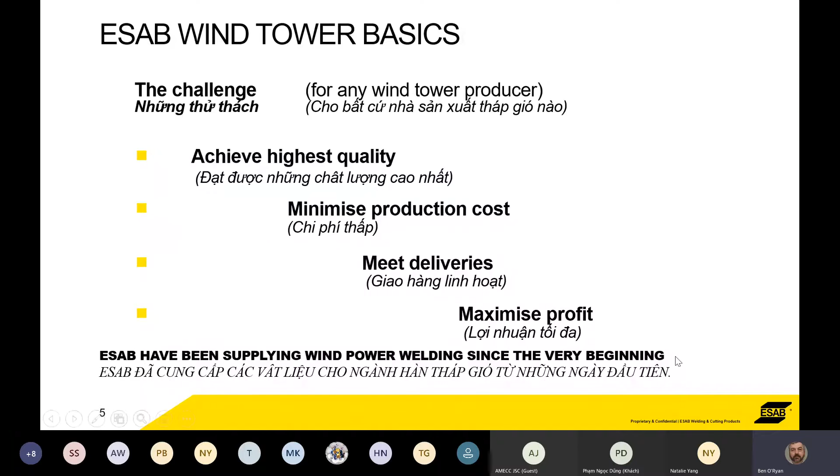Price too high. We hear this a lot from a lot of customers, and we need to embrace the total economy approach. So when you look at the operating costs, personnel costs, administration capacity, correction and reject costs is a big one, maintenance costs, all of these are under the waterline that you don't see from your initial purchase price. So improvements offered by ESAB can often more than compensate a higher price. We offer support to minimise this under the waterline exposure by buying quality equipment.

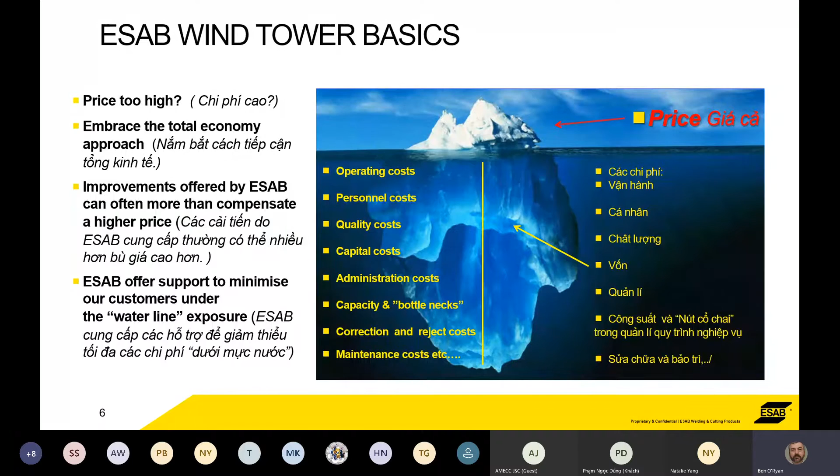We have extensive know-how and expertise in wind tower industry. Like I said, we've been in this since the very beginning. We can supply our customers with truly profitable investments.

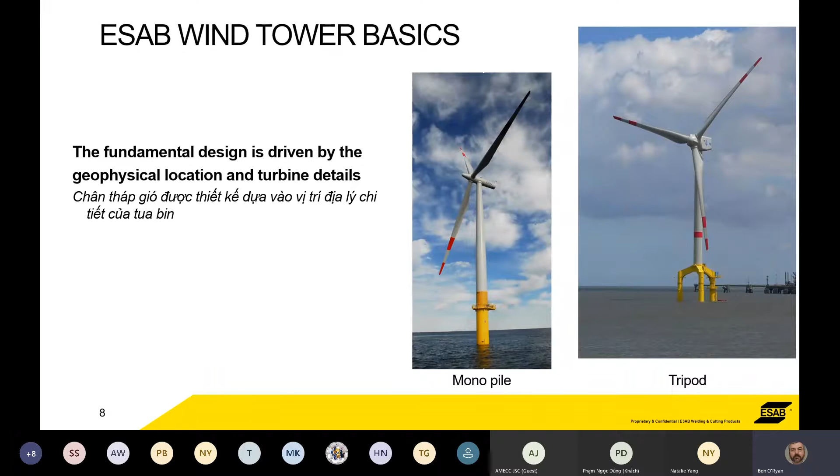When we start the fundamental designs, it's all driven by the geophysical location and turbine details. So this determines what type of wind tower is going to be placed in what location. And these pictures here, we show a monopile and a tripod. We also have jackets and tripiles, all different types of versions for supporting the towers.

So when we look at a wind tower, you can see that we have a nacelle sitting on the top. We have the tower piece itself, transition pieces, and you have the bases, and they can be monopile, tripod, tripile, and jackets. So how do we turn a steel plate into a wind tower?

Basic weld design and joint design quality requirements. These are the things you have to consider. The welding process selection, welding consumable selection, properties and performance, and very importantly, the third-party approvals that you're going to need for these predominantly offshore towers.

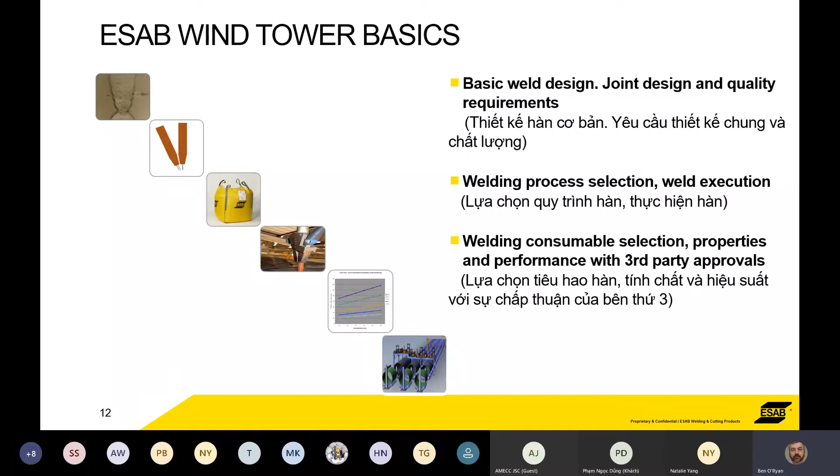Additional processes, root treatments and coatings have to be taken into consideration, and removing those coatings when you're going to weld as well. Productivity calculations, deposition rates, all of these things have to be taken in. Factory design, process flow with adaptation of environmental concerns.

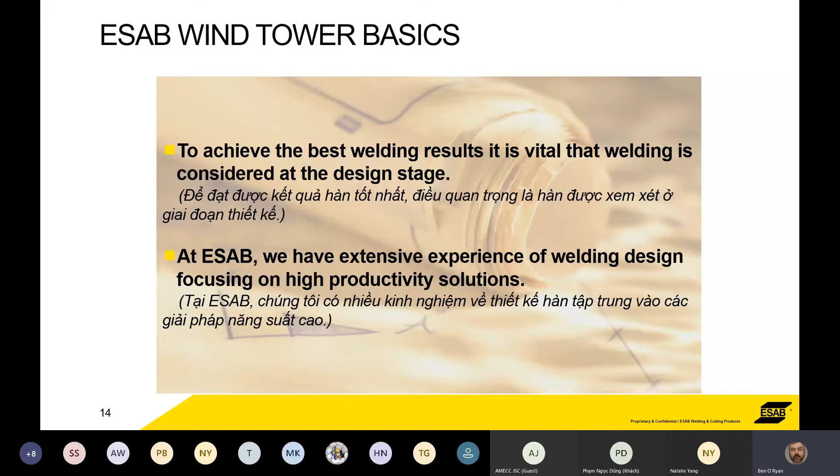So to achieve the best welding results, it's vital that the weld is considered at the design stage. So before you even start, you need to look at what type of welding you're going to be doing. At ESAB, we have extensive experience in welding design, focusing on high productivity solutions.

Welding in wind towers is a large part of the production time because the welding process is not so fast and it does take a long time, and it is a major part of the total cost. So efficient welding processes are needed to increase the productivity. The selection of that supplier and process are critical to achieving the highest efficiency and the maximum productivity.

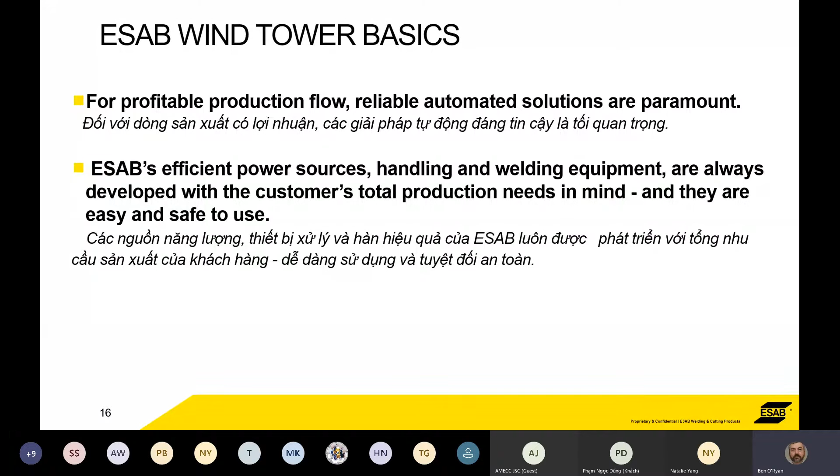For proper profitable production flow, reliable automation solutions are paramount. So you need to have reliable roller beds and columns and booms and/or gantries, ones that are not going to break down. ESAB's efficient power sources and handling equipment are developed with the customer's total production needs in mind. It's safe and easy to use because it's European and complies with all the international standards.

So when we look at this weld joint design, we talked about this a little earlier, it's the first decision you make. The weld volume reduction should be the aim. If you can reduce your weld volume, you're going to increase the speed that you can weld or produce the article. So if you can reduce it, it's always a good thing. Welding duty cycle, efficient use of welding stations. So you need to look at what the arc on time is going to be for each welding station.

Welding productivity: increased productivity reduces the welding time. Again, it's all about the speed, efficiency at limited additional costs. It can also determine how many welding stations you're going to need. If you're going to use a tandem with ICE, for instance, you may need one less column and boom, which can be a capital expenditure.

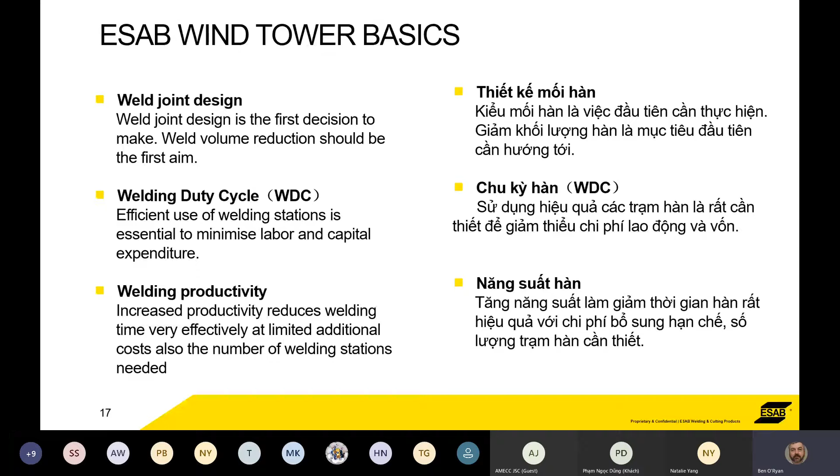So we look at the basic flows now. So we look at a plate and we have to cut that and you have to edge prep it. Once that's done, then it has to be formed or rolled into a can. From there, you need to tack weld it. Then it does longitudinal seams, both internal and external.

Then you put flanges on if you need a flange. So it's normally a flange on one end and then a flange on the other, so it's normally only two, depends on the design. And then you have fit up and growing lines, circumferential seams, which take the most amount of time, door frames, and then blasting and painting if required. Some monopiles don't need to be blasted and painted.

Cutting systems, this is where we start, because you have to cut and prep the plate. With our modern cutting machines, you can get a perfectly prepared weld preparation, accurate and ready for welding. All that needs to be done is a light clean and then you can start. Milling's also become a common alternative, and this is used for a narrow gap alternative. So semi-narrow gap, not full narrow gap. I have a short video here on the process.

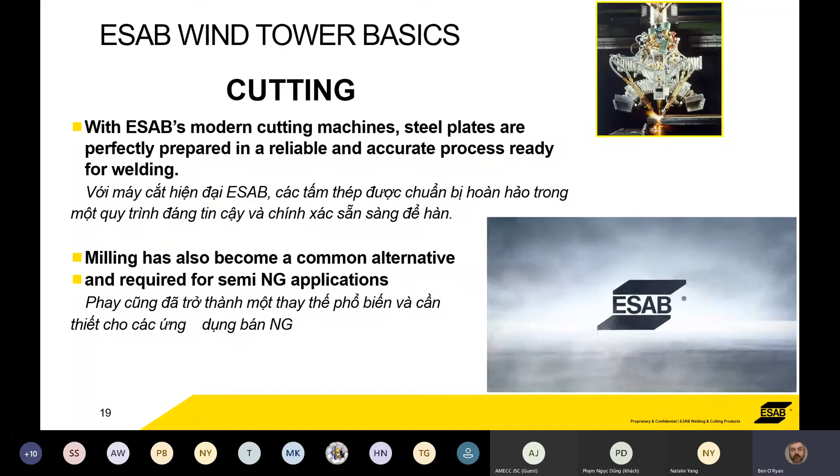So we talked about narrow gap on the previous slide. This is becoming a much more common weld preparation for wind towers if we're looking at very thick materials, and in this case it's 80 millimeters thick. Some of our narrow gap applications we've put in place already have been up to 95 millimeters, and these welding heads can go up to about 120 millimeters. You must use a milling machine for these, so it's not an oxy-fuel application.

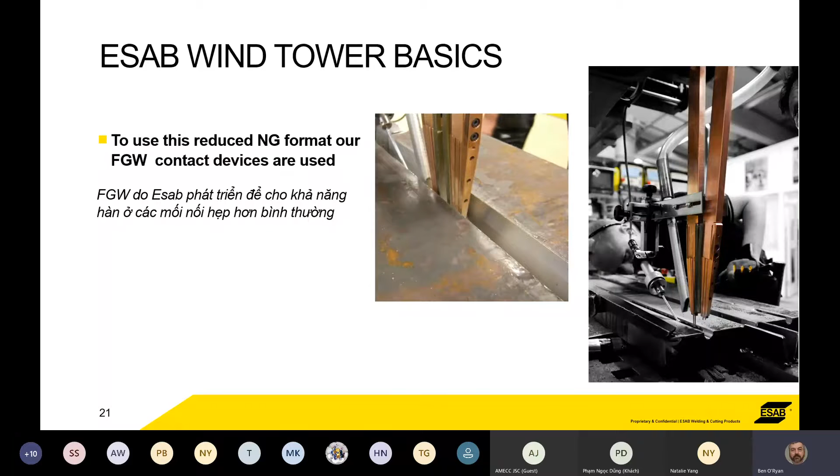To use these, we have specialised welding torches, and they are tapered at the correct angle, and they're insulated. And this is what you'd have to use for these very narrow gap applications. After cutting and milling, the plates are rolled into circular shapes and tack welded.

Power sources, welding heads, control units, columns and booms, roller beds, flux systems and more all have to be incorporated from this point on for all your welding. To do this, you need to weld the internal long seam on both the outside and the inside, so you need the roller beds as well.

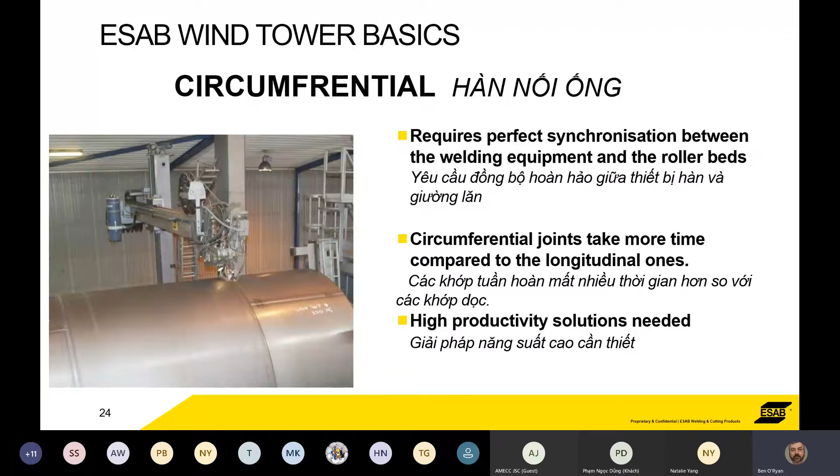Circumferential welding. This requires perfect synchronization between the welding equipment, your column and boom or your gantry, and the roller beds to give you the correct welding speed. Circumferential welding joints take more time compared to longitudinal ones. So you need to have a high productivity weld for the circumferential welds.

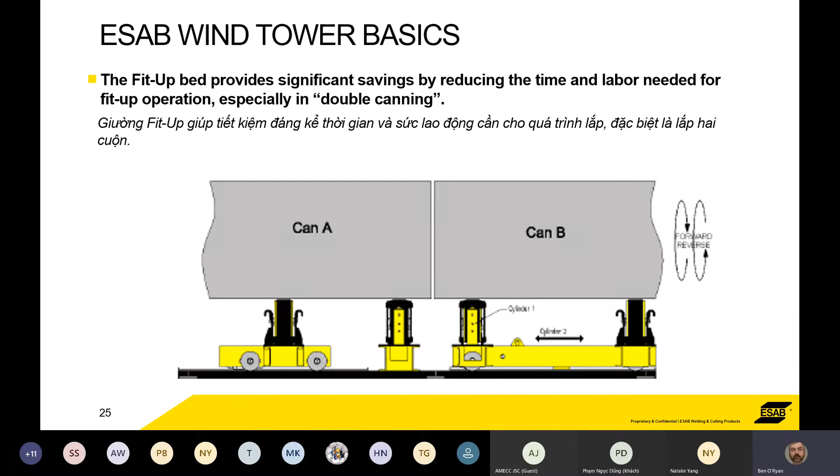Fit up beds. A lot of people use fit up beds to do a can-to-can application. This reduces the amount of time on the growing line. So it's up to the customer whether they need to do double canning or whether they want to go straight from can direct to the growing line. So this is just a picture of how these growing lines work.

Oh, excuse me a moment, I'll just turn on my pointer.

Here you can see that these have hydraulic units on the fit up bed and one drive. So this makes it very easy to align your cans so they can be tack welded, and then the circumferential weld can be carried out. And then we move into the growing line format. And this is what most wind towers are using today.

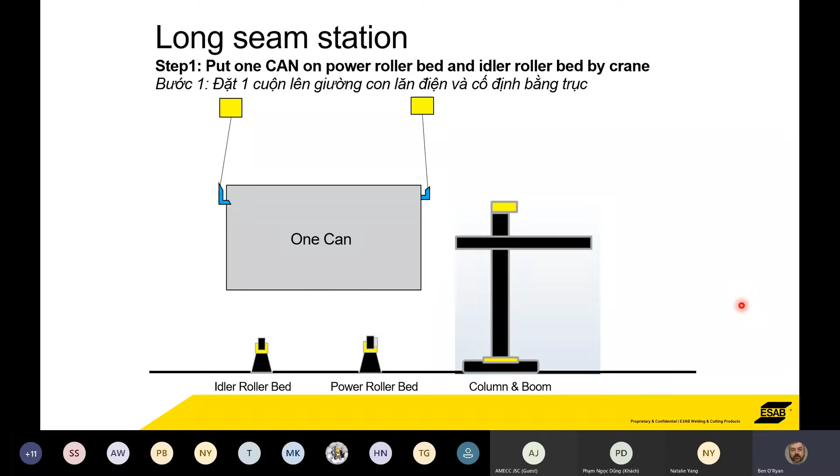So we start off and we have one can. So this is where we're going to start from the long seam. We have a column and boom. We put the can onto the roller bed, and then we weld the long seam, both external and internal. And then we move by crane from that point to your growing line.

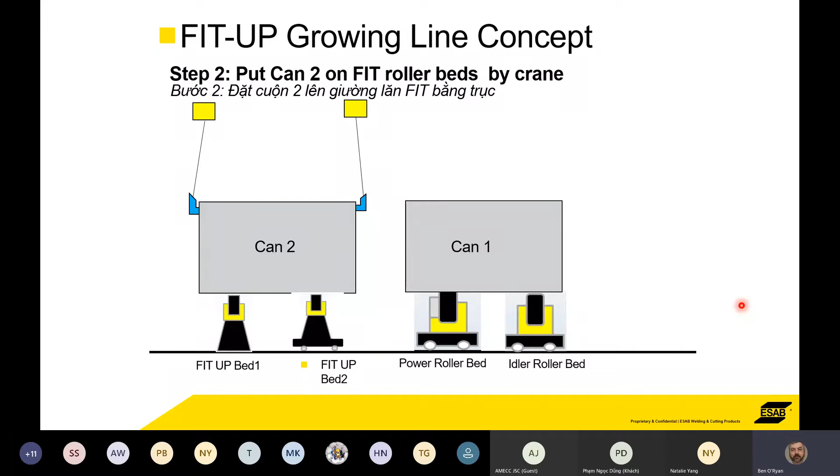And the first can is put onto the power and the idler roll by the crane. Then you get the second can and you put it on the fit up bed. Now both of these fit up beds have hydraulics, so you can align the two cans. So once that's done, you push the two cans together and then you align them.

Once aligned, you then tack weld. Once they're tacked in place, then the circumferential welding can be done from the external and the internal using a column and boom. Once they've been welded, then you move with the drive roller, power roller and the idler roller, which are on bogies, driven bogies. You move them off the fit up beds.

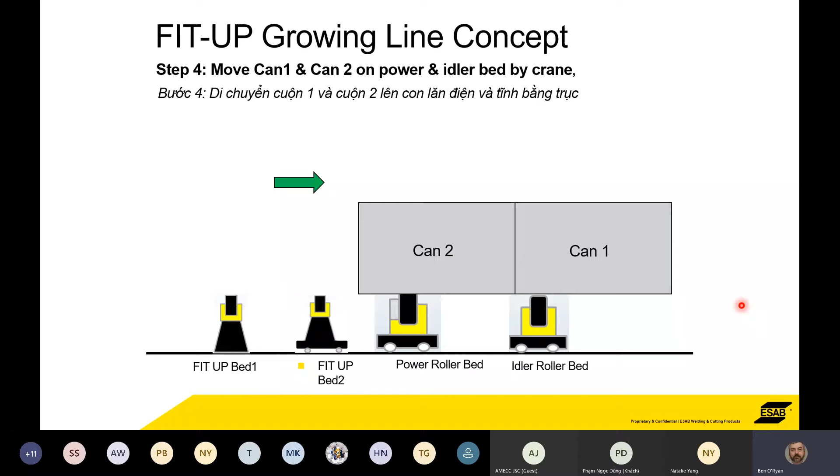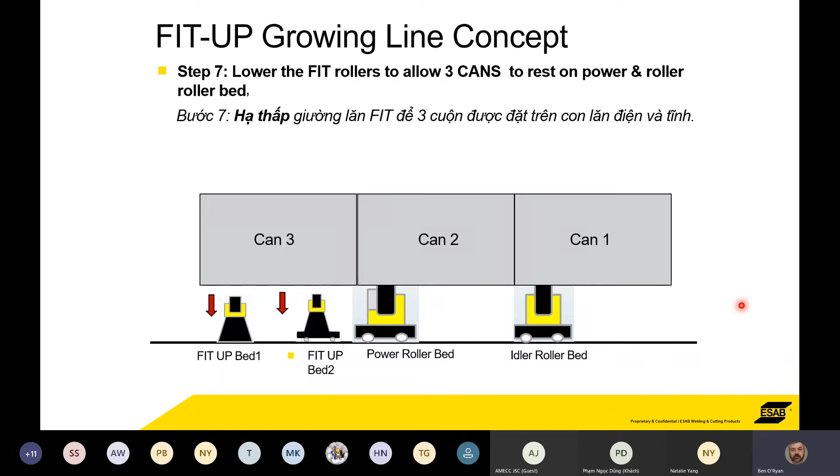Then you add another can onto your fit up bed. Join those two together or drive them back together. Tack weld. Then you're going to weld the internal and external welding. So then you have three cans joined together. Once those three cans are joined together, you then use the hydraulics on your fit up bed and drop the rollers. So the whole can is then supported on the power and the idler.

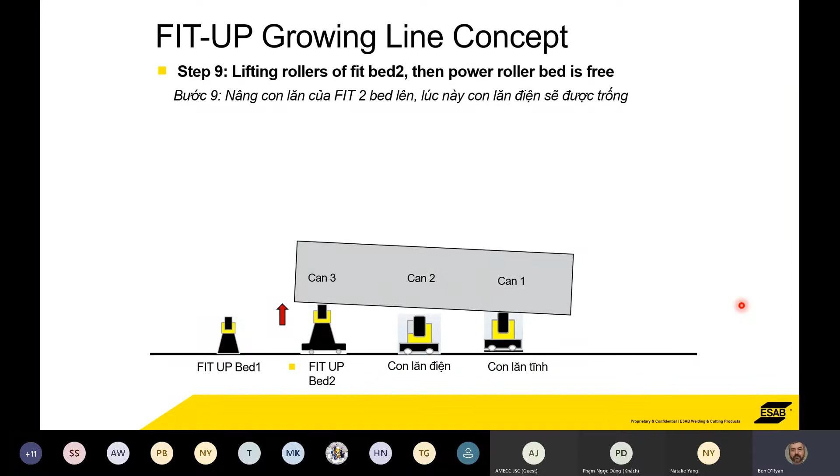Then you drive the power and the idler down your growing line. Lift up the fit up bed so you can release the pressure onto the main drive roller. Move the drive roller back into position. Drop that back down. Then you can add can number 4.

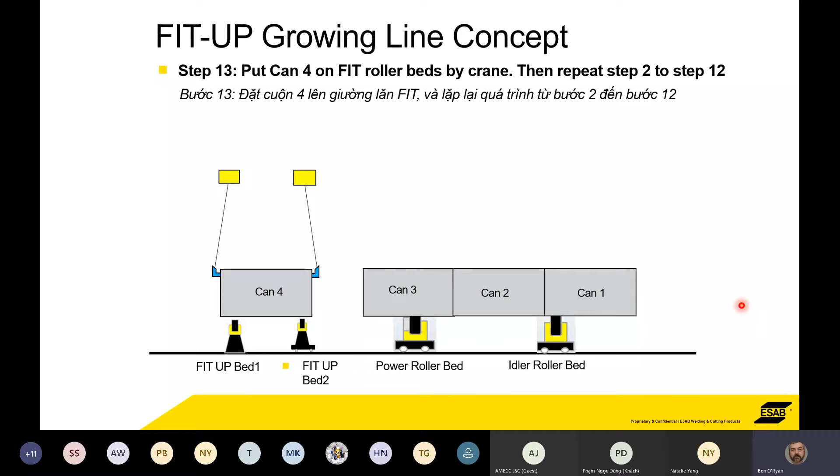So once you've added can number 4, you're going to repeat the process, and then you will just drive these together, tack weld, do the internal circ weld, do the external circ weld, and then do the same process over and over again to grow your cans into a tower, and 30 to 35 metres is pretty average for one of these systems.

To do all the tack welding, we do recommend that you have a good quality MIG plant. In this case, we prefer to use a Warrior. It's a multi-process MIG plant, which can do stick welding, MIG welding, and you can also gouge with this if you need to. It has very bright displays. It's easy to find the right process for optimizing your settings. It has a remote control, two-stroke, four-stroke, quick connections. There's no tools needed when fitting cables and hoses, so this saves a lot of time.

Door frames. The tower doors require special attention, and there is very high pressures applied to door frames, particularly when they're offshore. They can be hit by very large waves, so they have to withstand a lot of pressure. So we have CNC controlled cutting and welding equipment to fulfill this task.

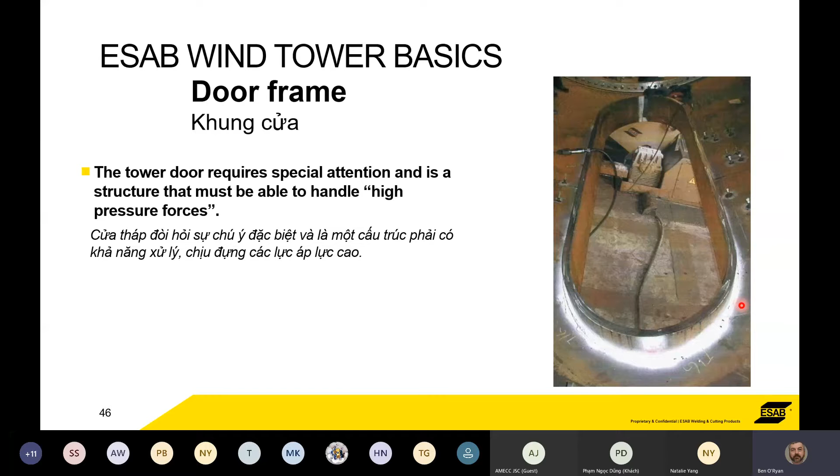Once this is done, blasting and painting is necessary. For onshore towers, of course, they're all painted. Some monopiles are left raw and not painted, so it depends on the design, on who the supplier is. And all the blasting and painting systems use explosion-proof motors and electrical cabinets, because we don't want to have any fires or explosions with all the paint particles flying around.

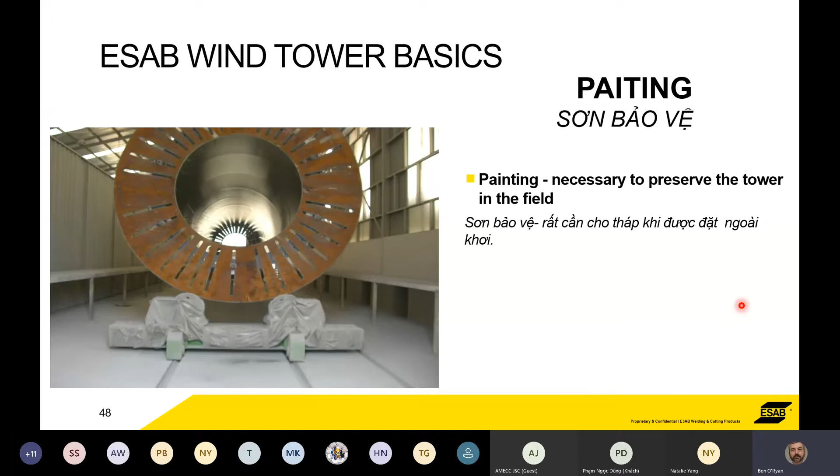Then we go on to welding. The choice of welding affects the deposition rates and the required travel speeds. You can start off with looking at a single wire system, which a lot of people used to use. Twin wire has a great fill process, but it doesn't have very much penetration. Then you look at tandem, which is pretty much the standard for most wind tower producers. And tandem ICE, which is becoming more prevalent. Places like SIF and Bladt use tandem with ICE. And you have multi-wire systems, which are normally DC, AC, AC.

All of our systems use our PEK control. It's a very easy system to use. We've had it for quite a few years. It's very powerful. It's CAN bus controlled. You can select the welding processes direct from the screen, presetting of all welding parameters before you strike an arc. And that also means that you can check your heat input before you actually strike the arc. And it has 255 parameter sets, so you can store 255 programs for welding, and you can transfer those from PEK to PEK. So if you have 9 columns and booms, they can all have identical welding programs.

Constant current or constant wire feed, adjustable dynamic arc control. It's something that a lot of other people don't have, and it stabilizes the arc, particularly when you've got longer cables. USB slot for data backup and transfer. Heat input visible on the display while you are welding in actual real time, or you can have it in presetting mode to calculate before you even start the weld.

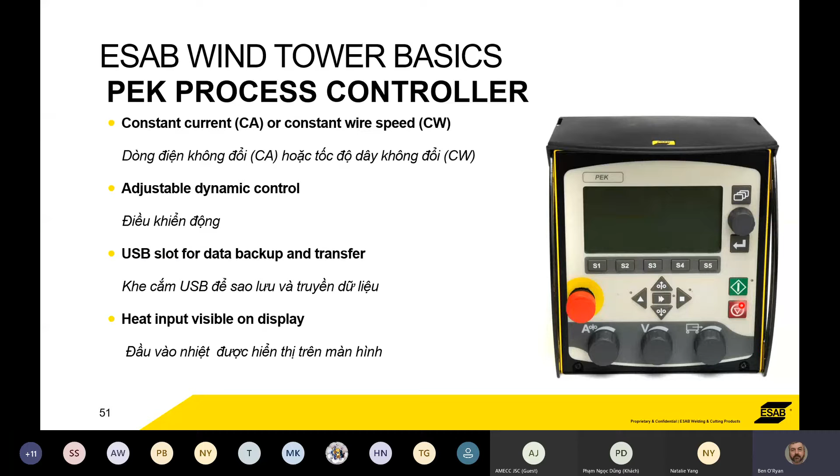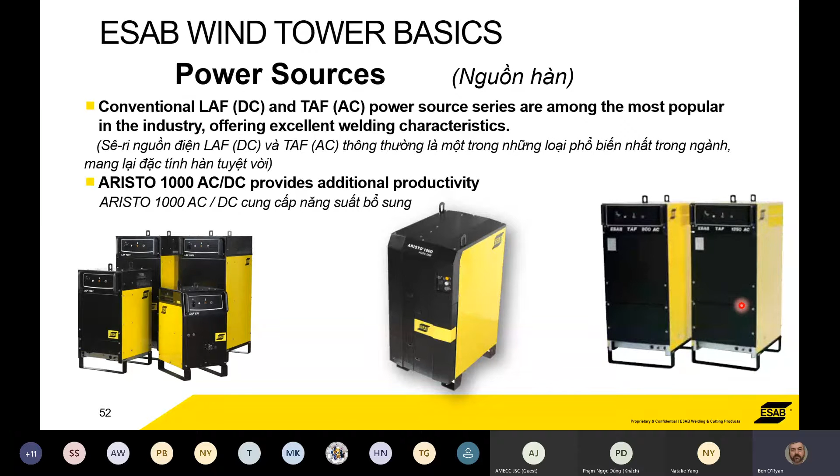Power sources, we have conventional DC and AC power sources. They're amongst the most popular in the industry, offering an excellent welding characteristic and a very long lifetime. We also have our Aristo AC/DC power source, which provides additional productivity with some offset and balance configurations.

Welding heads. Generally, wind towers are welded using the tandem process, which I discussed before. Tandem Twin is an ESAB patented process, and this gives basically the highest deposition rate for a tandem process in the market today.

Internal welding on the wharf. We've seen this many times. Long wind towers, monopiles, can be up to 70, 80, 90 metres in length, and generally have to have the final assembly done at the wharf. So you'll need to look at either having a gantry on the wharf, which also has overhead protection from the weather, because you can't have the equipment being rained on. And internally, they weld using normally a tandem tractor, so that weld prep is different to the rest of the weld preps.

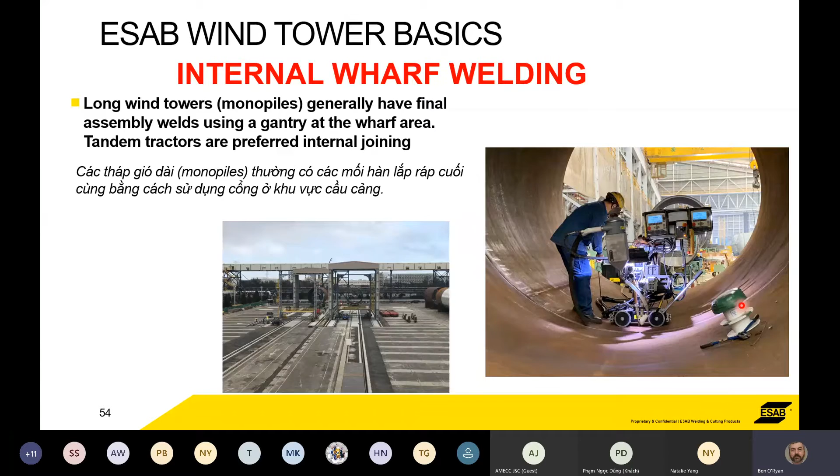WPS for wind tower production can be a time-consuming task. You've got joint preparation, currents, voltages, stick-outs, electrodes, welding speeds, offsets, all these things that you have to make sure you've got the right parameters for to give you the maximum productivity. With ESAB, we have a lot of experience with welding wind towers, so we can actually help you out and reduce the amount of time spent getting your WPS in place.

Handling equipment. We have handling equipment all the way up to 1,000 tonne, so we can do very small ones down to 5 tonne and all the way up to 1,000 tonne. You need these welding rotators to support the cans or towers and roll them at a constant speed, and in a lot of cases at a very high speed, so they need to be quite robust.

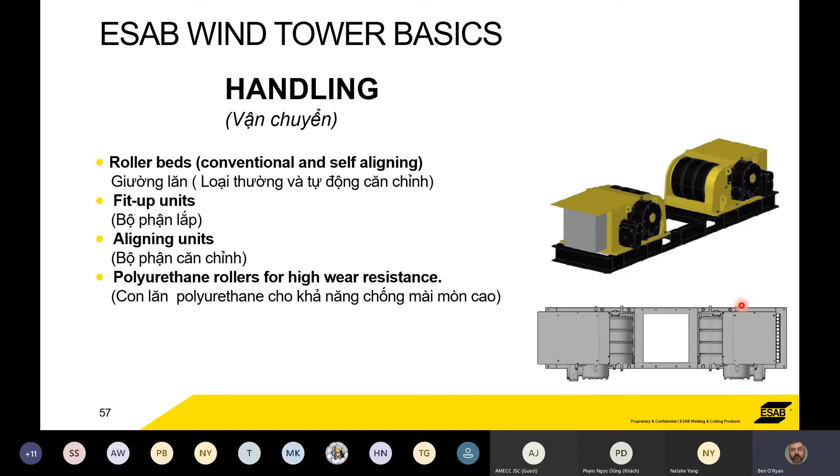We have fit-up units, self-aligning units, conventional units, and hydraulic-driven units. We also use polyurethane rollers for high wear resistance on a lot of the larger diameter monopiles, for instance. You don't want to be going over the long seams with a steel roller because it will snag and slip, so you really do need to use polyurethane rollers.

Built to withstand harsh and rugged industrial environments, these can be built for outside use, they just need a different IP rating, so they're built differently. They are fully integrated to our column and boom for rolling speed via the PEK controller. So when you dial up your speed on your controller, these roller beds will give you an accurate welding speed.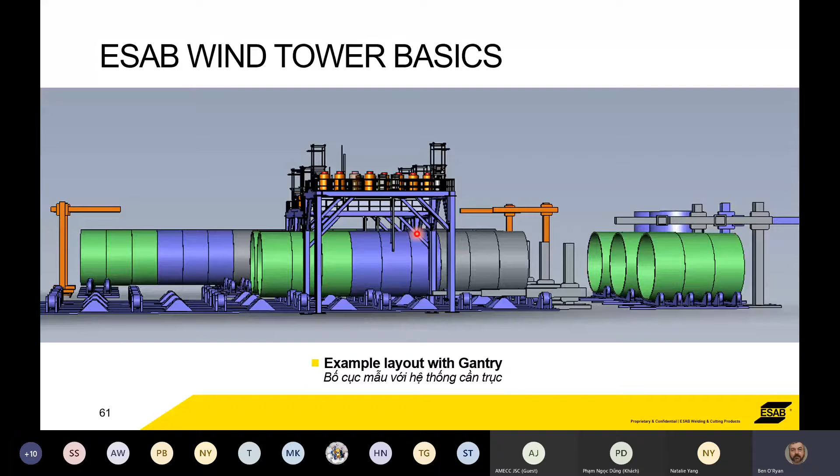Another example, this is the same setup. If you're wondering about the column and boom on the end, this one is actually used for putting the flanges on, and these columns and booms here are longer ones to weld 3 cans at a time. So the externals are welded on the gantry, the internals are welded with a column and boom.

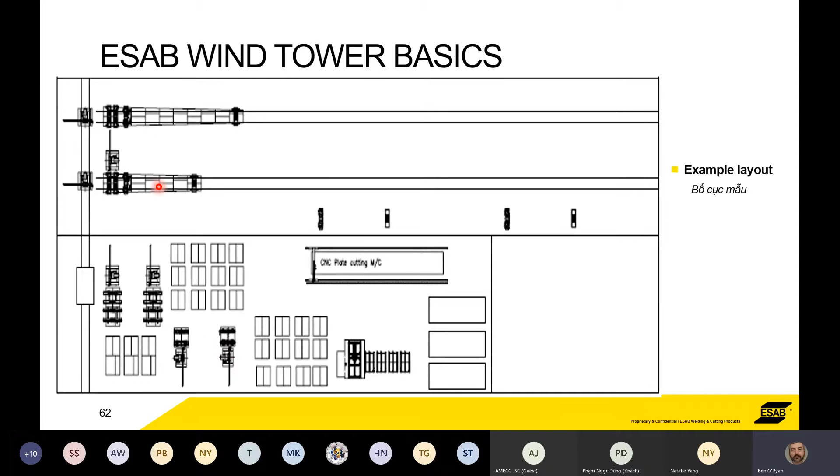When we talk about columns and booms, you need good quality columns and booms, and ones which are very safe, because a lot of these diameters of wind towers now are getting quite large, 8-9 metres in diameter. And when you put those onto a roller bed, they can be 10 metres tall. So you need a column and boom which is going to be 12 metres or 11 metres high, something very safe for an operator to sit on when he's sitting 8 metres in the air and 6 metres out over the top of the weld point.

All these columns and booms come with an 8 times safety factor, so we've taken that into consideration and made a very safe column and boom to use. It has full integration, so like I said before, our PEK has full integration into the roller bed systems, and it comes through with one pendant.

This one here is a 9x5 column, located in Thailand, and we have here an RCC1. Our operator pendant controls everything: rotation, lifting of the boom, rotation of the boom, starting and stopping of power sources, flux on off, flux pickup on and off. All of those things are controlled from one pendant here, and it makes it very easy for the operator.

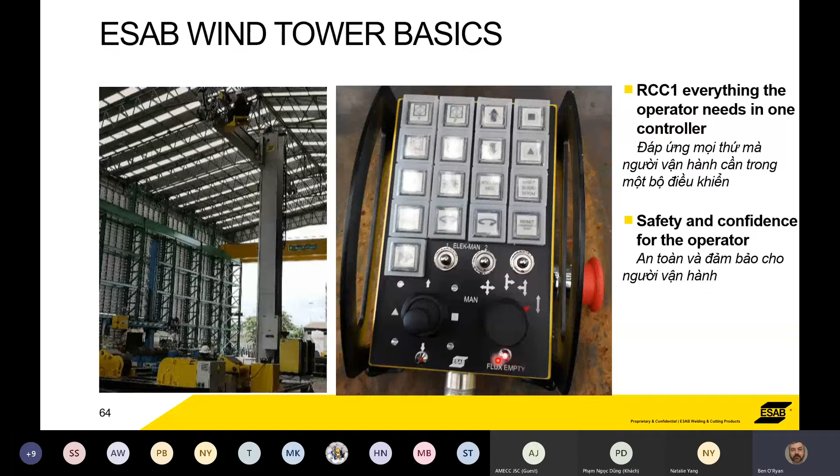Even feeding wire with these switches here for electrodes, he can feed his wires here. It also has automatic joint tracking, which he can control, and flux on. It also has a flux empty light, so if you do run out of flux, he knows.

Consumables: if you want to make top quality wind towers, you need to have the right consumable. It's pretty essential that you have the right consumable. We offer a full range of wires and flux with proven wind tower production in mind.

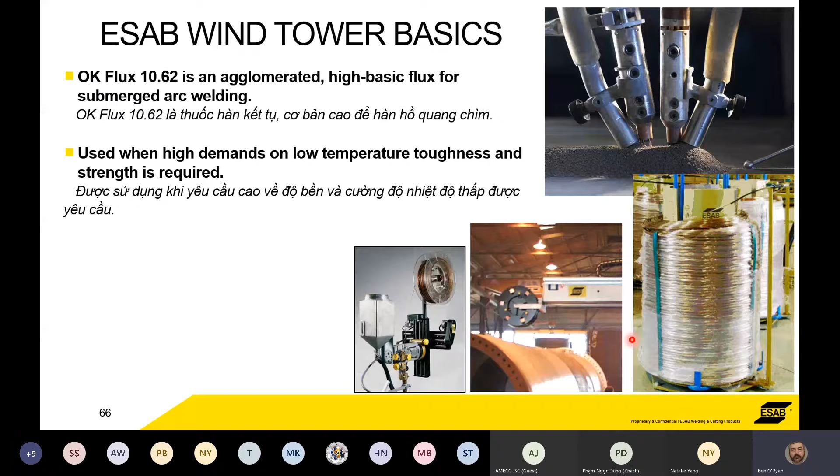1062, 1071, agglomerated flux for submerged arc welding, used for high demands and low temperature toughness. All of these things, if you've used ESAB wires and fluxes before, you'll probably already know these. Used in offshore construction, wind tower, monopiles, drilling rigs.

You can get it in 30, 100, 600 kilo and 1,000 kilo payoff packs, so the wires are available in all those sizes. For fluxes, you can actually get flux tanks in 75 kilo, and you can get them in 250 kilogram, 500 kilogram and 1 ton flux delivery systems.

One of the things we can offer is our adaptive welding gantries. These actually take all the work away from an operator. They are an option, of course, but the operator only adjusts the maximum minimum parameters, which gives you a heat input. The system will automatically adjust the rest: layer, thickness, width, height, voltage, current, travel speed. All of those things are taken care of automatically by the system, so the operator is really only there to make sure it's still operating within its parameters.

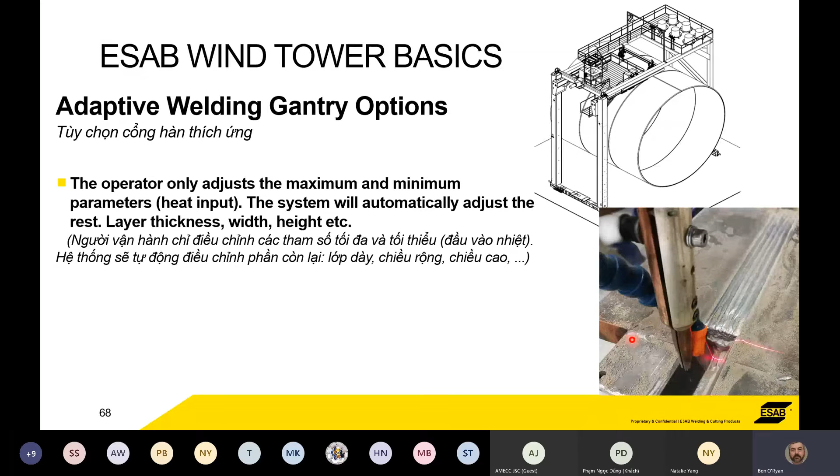We talked about ICE previously, and I just want to touch a little bit on our ICE system because of its high deposition rate. If we look at a single 4mm wire welding conventionally, you're going to get roughly around 7 to 8 kilograms an hour - sometimes less, sometimes a bit more, but average is about 8. If you look at our ICE system as a single torch, only running at 70%, we can get up to 22 kilograms an hour. So there's a marked difference in the deposition rate from a single power source for a 4mm wire to an ICE system.

But the one to really compare is the tandem. If we take a 4mm single wire DC and a 4mm single wire AC, you're going to get between 18 and 19 kilograms of weld metal per hour. If you look at our tandem system, a 4mm lead on the DC to give you penetration, and then we look at the ICE trail for our fill, we can get 40 kilograms an hour, and we have many stations in Southeast Asia running 34 to 36 kilograms an hour, and that's the average. So we know this process works extremely well.

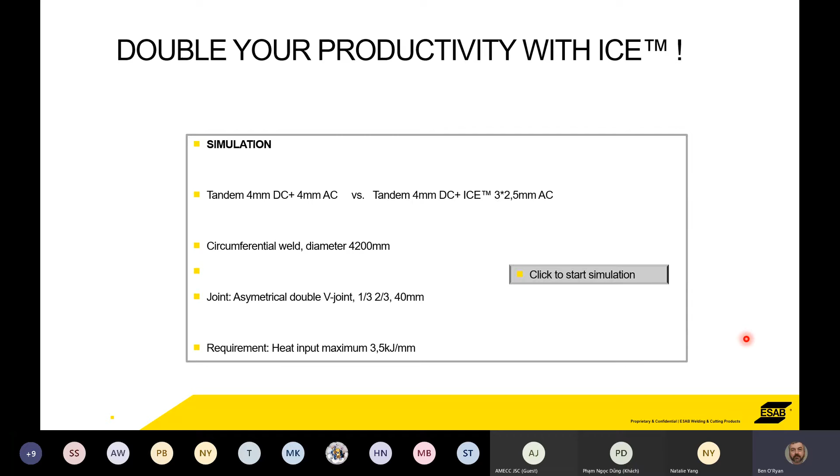I have a little simulation which I will run through, comparing that tandem 4mm conventional, still using conventional power sources, but changing the AC fill to our ICE process. So it's a 4.2 metre diameter, asymmetrical double V, 1/3, 2/3, only 40mm thick material, and we need a 3.5 kilojoule heat input. You still need to have a mag joining pass all the way around, which is done by hand, so you still need to have your Warrior or your MIG plant there.

So when we look here for a standard tandem, we were getting 17 kilograms an hour, but with the ICE system, we were getting 33 kilograms an hour. And because we're depositing more material, we're actually using less passes, which means we're going to have a reduction in our flux usage because there's not as many passes. There's no removal of the tack weld because we're using punch-through technology with this process, and we're 60% lower in welding time.

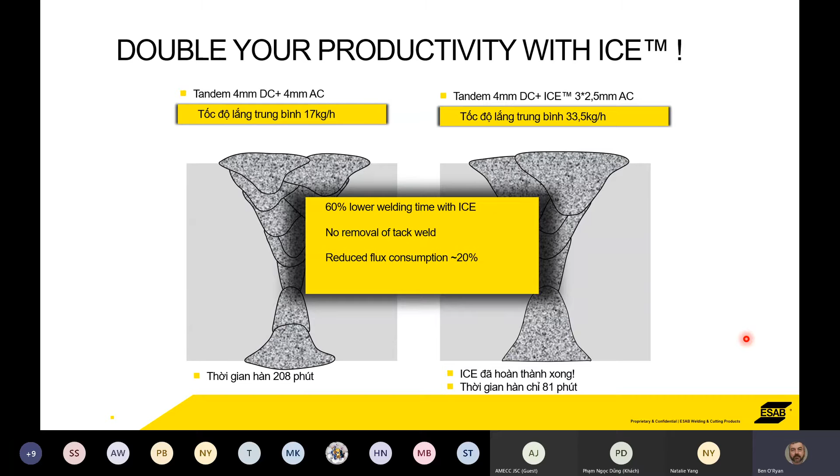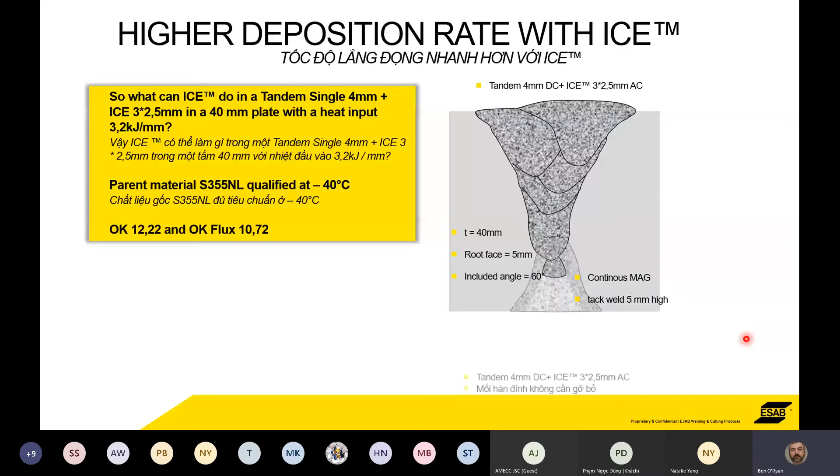So when we look at this, we can see that our fill runs were 36 kilograms an hour, but we are also traveling at 1 meter a minute. That means the roller bed process, or the roller beds, have to be of a quality that they can roll a very heavy, large diameter vessel - because that's what it is - at 1 meter a minute smoothly.

PWPS, we can actually help you out with that. We have programs which can give us a comparison to what you're planning to weld and what you can weld using an ICE process. So we can do these calculations for you, and then you can compare how much time you can save. This one's a double V, 60 degree, 6 millimeter land, 32 mil outside, 18 millimeter inside.

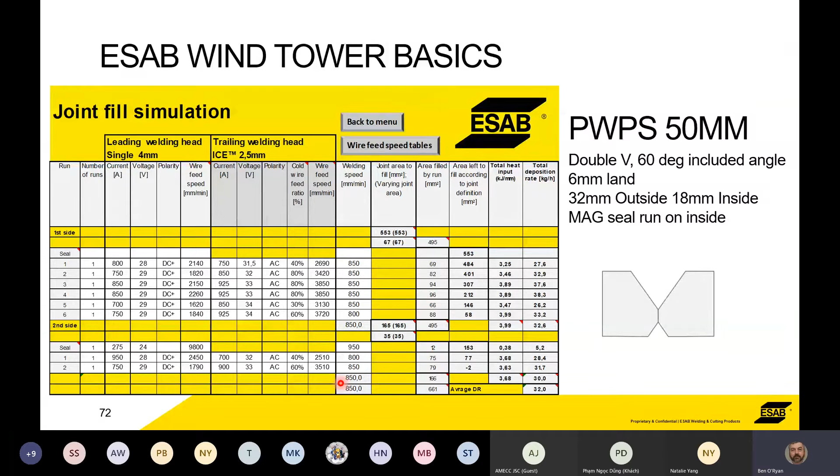You still need the mag seal run on the inside, the same with every joint. So when we looked at it, 8 runs, 3 millimeter overlap, welding speed was 850 millimeters in this case, 27 kilograms on the root run as well, with a heat input below 4 kilojoules. So the slag came out very easily.

All wind tower processors now, they're looking more and more, or the owners of the wind towers are looking for data logging. Our PEK comes with data log already as standard internally, and you can take that file via USB, or you can get that information out of the PEK via WeldCloud. So this is an option if you want to go for this system. This will log all your information from each welding head and store it into a system.

You can then log on to that with your tablet or your computer anywhere in the world, and you can see what's happening. Is there a breakdown? Are they welding? Are they welding to the right WPS, etc.? So you can check all functions.

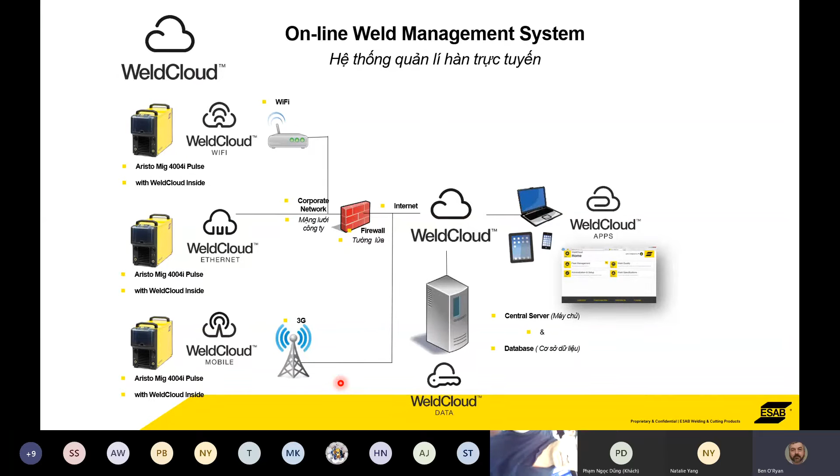We also have our Weld QAS, and this is an accurate calculation of weld parameters, and a data logging system which is very advanced. We have a number of these systems already installed in Taiwan and other sites in Asia, and they've been very successful. They quantify productivity and provide suggestions on improvements.

There's a reduction of non-destructive testing because they're doing data logging all the way around the weld, so there's less administration cost. Real-time WPS adherence control makes it easy, and a reduction of auditing, so you don't have to do as much.

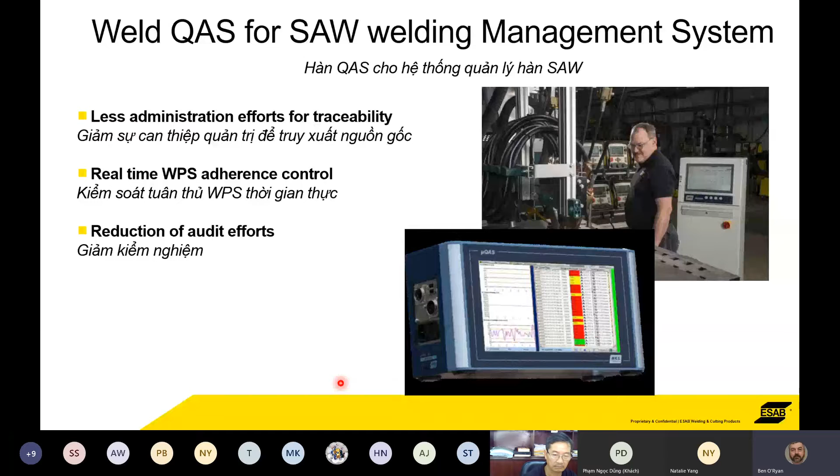One of the things that people keep forgetting about welding is shear key. Shear keys are used on the outside of a monopile and the inside of the transition piece. They're generally welded with a column and boom using sub-arc, or sometimes the MIG process. The purpose is to increase the sliding resistance between the grout and the steel to avoid settlement. So it's something you may have to put into your line somewhere. If you're going to produce wind towers, you may need a separate station for shear key.

Equipped with a strong team of experienced designers and developers and installation specialists - and the installation specialists are really specialists, they're the ones that help out the most - we are prepared to face any welding challenge in the wind tower production arena.

Some of our success cases - some of these are a little older now, but they're still in production. Vestas announced construction of what was then the world's largest wind tower manufacturing plant, in Colorado. ESAB was selected for our ability to design, deliver and service a really large venture like this.

In Denmark, this one was for the largest offshore wind farm, fabricated by Bladt, and we still supply equipment to Bladt in Denmark.

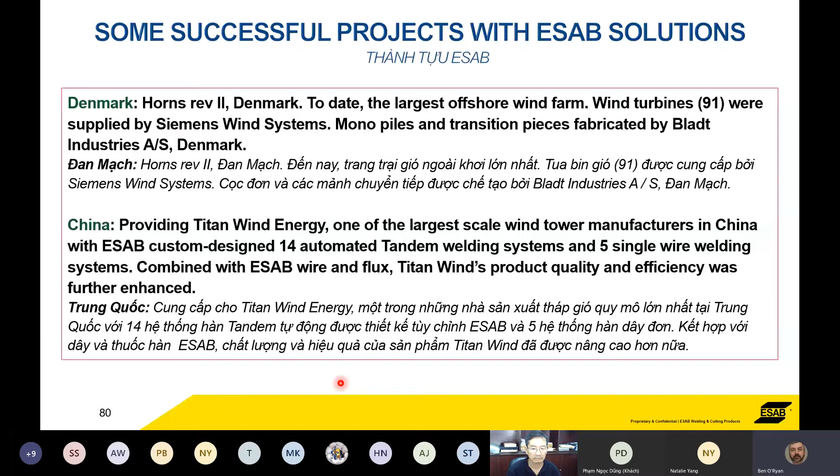In Thailand, there was construction of 30 transition pieces, and they were quite large. We were selected to supply all the welding and consumables for this project due to our proven track record. They used tandem with ICE on all their columns and booms, and also tandem tractors for internal welding.

In Taiwan, 2019, there was a major upgrade of 7 existing ESAB columns and booms from single wire to tandem, so they could increase their deposition rates from 7.5 to 32 kilograms an hour. Narrow gap tandem mounted to 3 gantries was also supplied.

In Australia, just last month we won an order to fabricate large bridge pylons, 4 meters in diameter, so it's very similar to a monopile, and the equipment is basically identical.

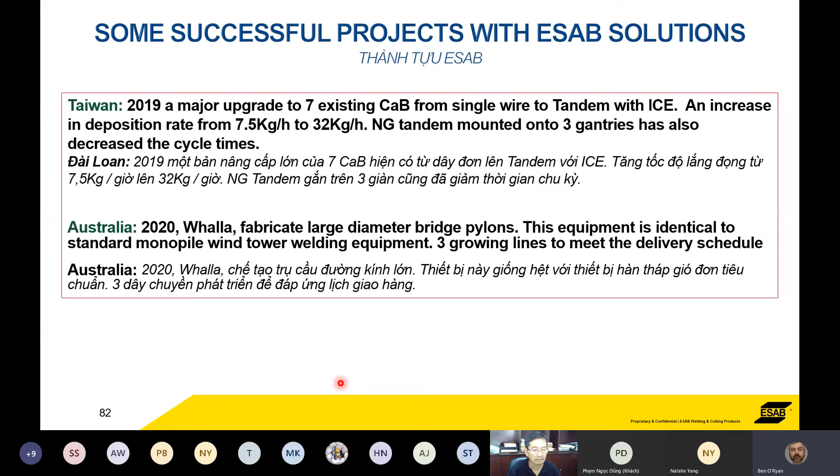I just heard today that we've also won another wind tower farm producer in Brazil, and they placed their order about 2 weeks ago for a number of columns and booms and roller beds from us.

Points to consider. I keep coming back to this about things you need to look at before you start building towers. Also need to look at some of these things because we've found some of our customers do forget these and they can cause some problem in your production rates. So undercover floor space, the available area to actually put your roller beds in for a 30-meter can or tower, which is going to be 5.5 or 6 meters in diameter. So you have 2 lines, you've taken up a complete hall.

The weight loading per square meter on the concrete floor. This is so important when you're looking at putting a couple of 100 tons on a set of roller beds. If the floor cracks or moves, then your alignment's out. Power requirements to look after to drive the power sources, because there'll be multiple power sources there for welding. The number of cranes and their capacity. Do they have the capacity to lift what you're going to be moving? Underhook height, like I said very early on in the presentation, you can have a very large column and boom and the hook from the crane still has to clear that at its maximum.

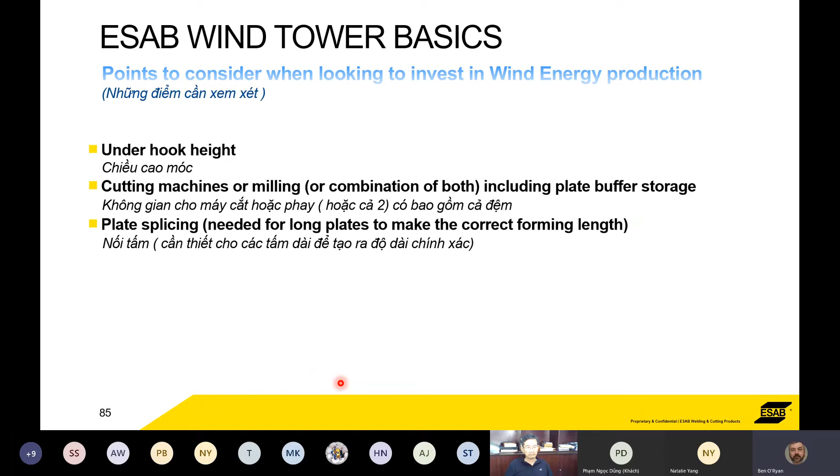Cutting machines or milling or a combination of both, including plate buffering and storage. Plate splicing. A lot of plates need to be joined because some places can only get them in 9-meter lengths, some can get them in 12, some can get them in 14. Whichever way, somewhere along the line, you will probably have to splice plates together to get the right forming length to make a can. Forming machine capacity and the buffer storage space.

Roller bed selections for each application, for long seam, can to can, for your growing line, whatever it's going to be. Always over specify the load handling. Don't go to the minimum. It's not a wise idea. CaB selection for each application. Note the underhook height. So the selection of the CaB, they can be different size columns and booms with different application heads. Weld head specification for each, whether it's going to be a single, tandem with ICE, whatever it's going to be, you need to select all of those.

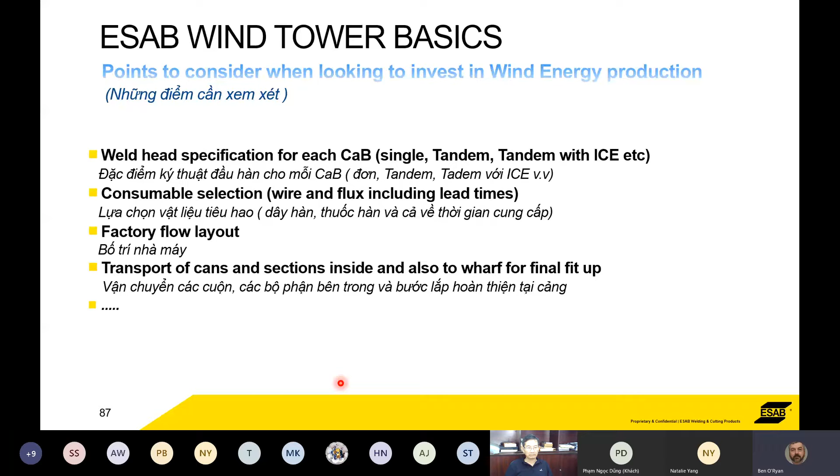Consumable selection, wire and flux, including the lead time to get the wire and flux so you can be on time. Factory flow layout, transport of cans and sections inside and also to the wharf for final fit up.

An example of our expertise is our beam welding machines. Beams of the highest quality are a requirement for large modern steel constructions such as bridges, skyscrapers, industrial buildings and arenas.

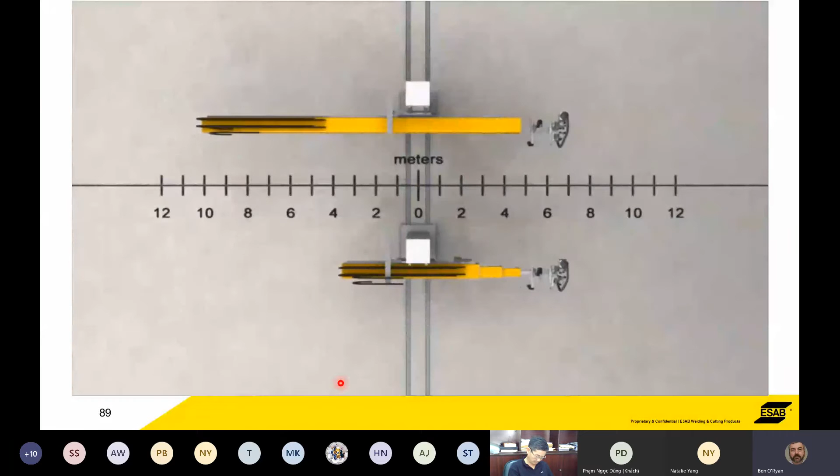Another example of ESAB engineering's continuous development is Telbo, a telescopic boom with several unique features. The most obvious is how compact it is. Where a conventional boom requires as much space behind as in front, a Telbo only takes up a fraction of the space. Telbo is used, for example, in the manufacture of wind turbine towers and platform pillars for offshore oil rigs.

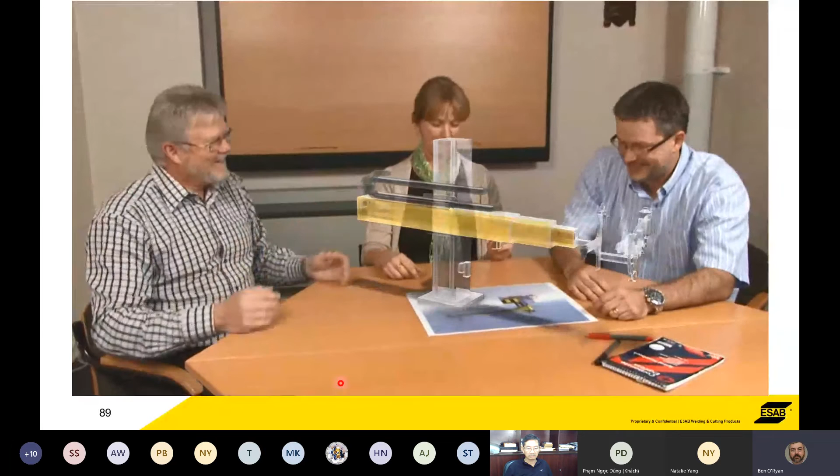Innovation, the capacity for new thinking and to quickly create fresh solutions, is fundamental for our success. We live to develop new products that can help our customers to increase quality while saving time and money. It isn't technology just for the sake of it. We are innovative and groundbreaking in order to be able to renew and improve our customers' operations. We are passionate about delivering results.

Innovation doesn't just require new thinking and imagination. Innovation also needs broad and deep knowledge of welding automation and the differing needs of our customers. Friction stir welding is one of the techniques in which we are world leaders. Through friction and high pressure, the metal in two separate pieces flows together without melting.

The weld joint consists of the original metal, and no impurities are created. The result is as strong as the original metal and requires minimal post-treatment. The technique is used in very demanding situations, such as in passenger ferries, trucks, and rocket fuel tanks.

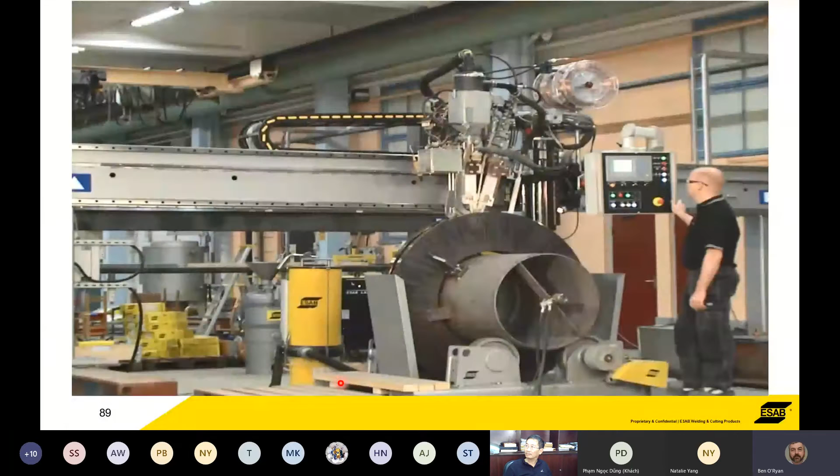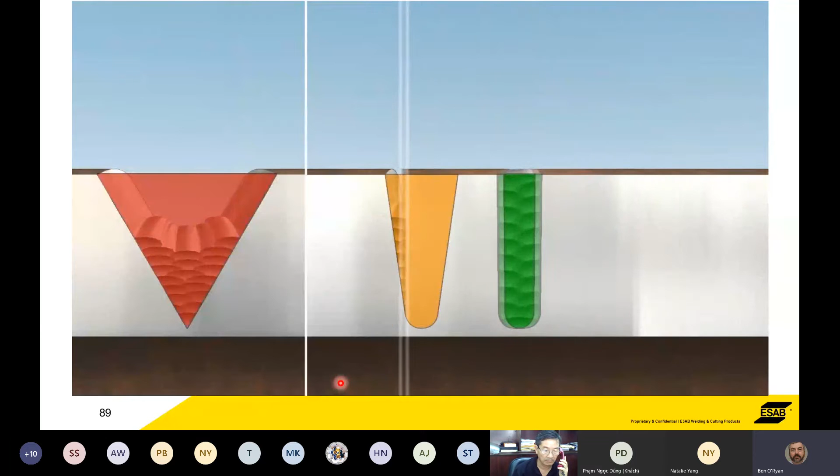Our world-leading narrow gap technology is a process for submerged arc welding of narrow joints in thick materials of both large and small diameters. Compared to conventional techniques, narrow gap can significantly reduce welding time and at the same time reduce the consumption of filler material. The technique is used for welding turbine shafts for the power industry and large reactor vessels for the nuclear industry.

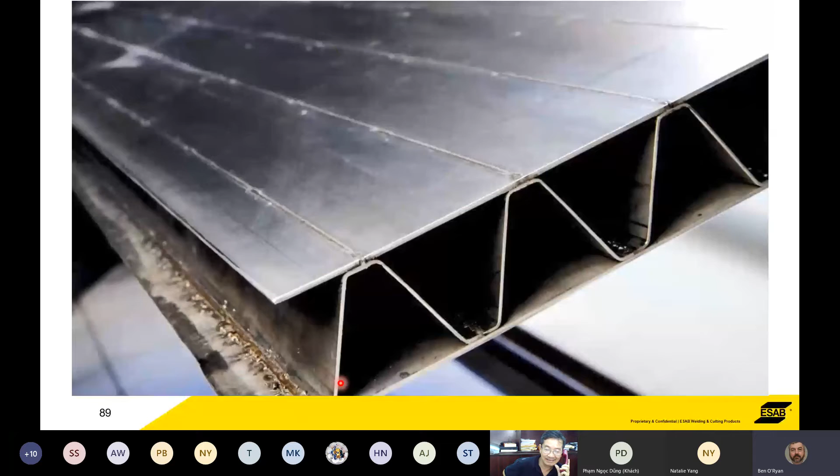Hybrid laser technology combines the best of both worlds. The deep weld penetration and low heat transfer of laser welding combined with the excellent welding characteristics of MIG or MAG technology. Weight-optimized ship sections, steel bridge constructions and excavator arms are just some examples of the technology's areas of use.

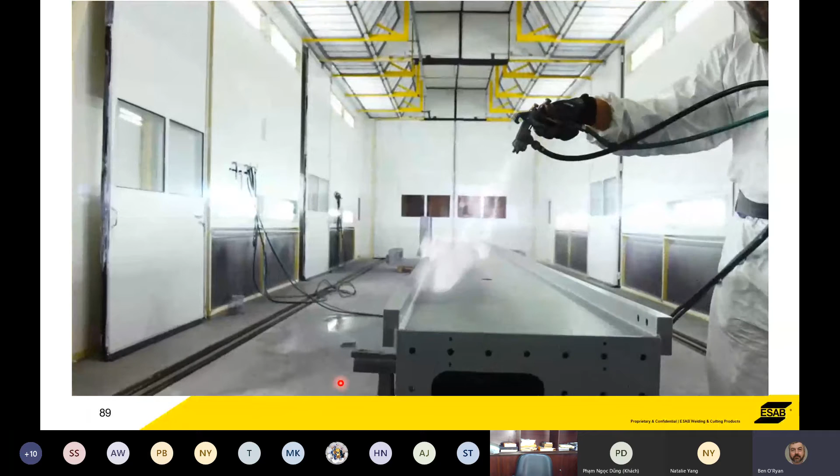Another example of our efforts to satisfy our customers' requirements for quality, price and delivery reliability is that we manufacture the bulk of our products ourselves and apply the lean production philosophy. This means that we use standards and clear structure to eliminate waste in all aspects of production. The heart of manufacturing is in Laxå. This is where we manufacture not only welding machines, column and boom, but also circuit boards, power sources and lots more besides.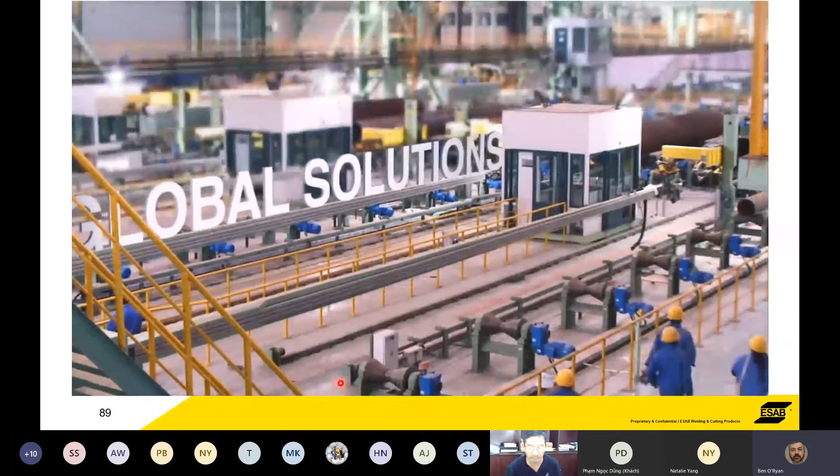Our turnkey solutions are complete installations that, in addition to welding equipment, also contain, for example, portals, column and boom, or our advanced roller beds, which are a requirement for handling and welding large cylinder-shaped objects. Machines for manufacturing chains of all lengths and sizes are another example of products with a high level of automation developed in Laxå. When you choose to work with us, you don't just get a supplier.

You gain a long-term partner that is never more than a phone call away. Regardless of whether we help you over the telephone or if you receive a visit from one of our talented local technicians, you can be sure that we are always there for you and will do our best to keep your production running without exception. We can also tailor training for your specific needs, for example, process training or training in filler materials.

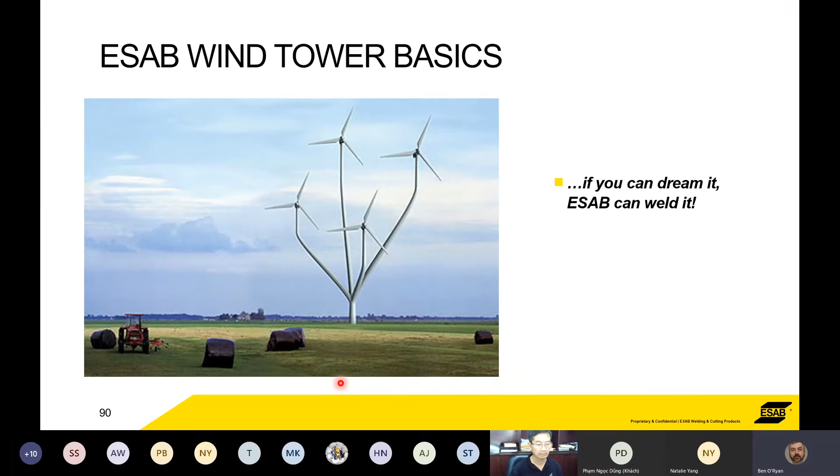Led by integrity, experience, innovation and partnership, we continue to develop in order to offer our customers the best products and services on the market. This is how we do business. This is how we look after our customers. This is how we reach our goals. So, this is a pretty unusual wind tower, but if you can dream it, ESAB can weld it.